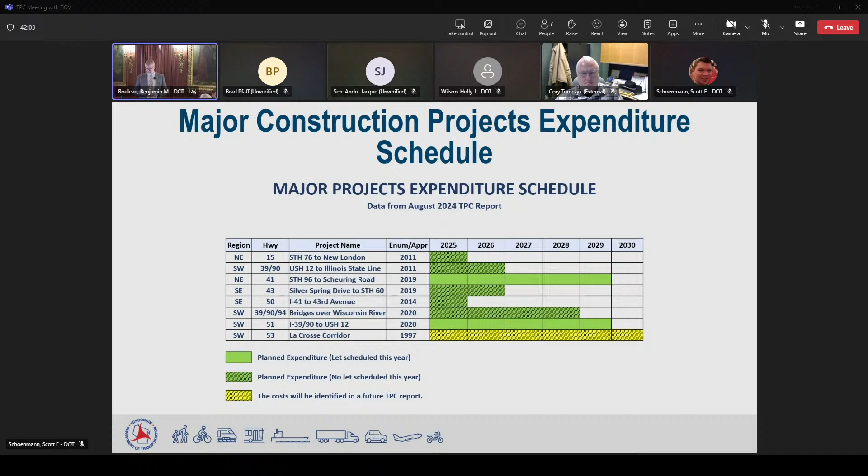I'll pause there to see if there are any questions before moving on. How does a project rise to the level of getting a study done in the first place? Where does that come from?

I'll get into that more later, but to answer your question, we go through a regular planning process in the department where we're always evaluating the needs on our system. Depending on the type of need, we go down two different paths. If it's rehabilitation, we handle those through our highway rehabilitation program, which is statewide. We have needs across the entire state, we identify those needs, and those are funded through SHRs.

For major highway projects, we'll see a definition of what that is a little later. When we see those needs pop up in our analysis, we do additional analysis to determine the best approach. Then we come to you, the TPC, and recommend further study of that project. If approved, we continue with that study. If not, we reassess how to address those needs, perhaps with temporary measures.

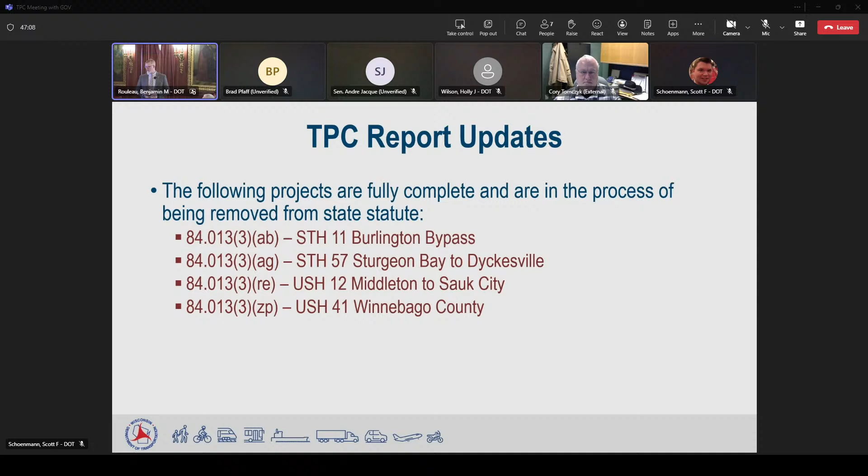Okay, a couple other things to note here. We've had some projects fully complete with their construction. As we reach the point where projects are completed with no more expenditures, we go through a process to remove those projects from state statute so they're no longer represented in the program, though we still note them in the report you receive regularly. So those are the 4 projects we expect to remove from statute this year.

I would also note State Highway 23 is currently open to traffic, so in our reporting we'll be moving that from active projects to the mainline open to traffic section.

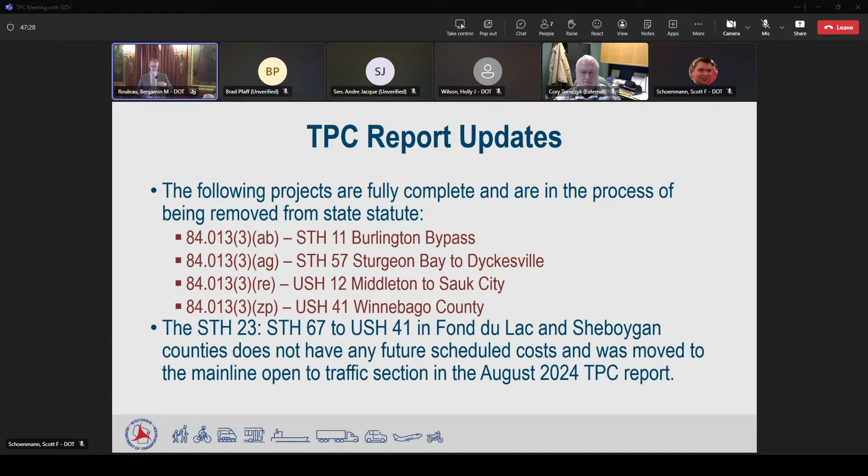I'll go over the roles and responsibilities over the next couple of slides, then give a quick overview of the project that Scott's going to talk about in a few minutes. There are really 4 core responsibilities for the TPC. I'll go through each one. It's to review and approve or deny potential major highway program projects for environmental studies. That's the process we were just talking about, where we've identified a need and need to go through the environmental process. We come to you seeking approval to begin that process.

Once we've gotten through that environmental study process, we come back to the TPC looking for a recommendation for enumeration. For a traditional major highway project, we make a recommendation to the TPC for enumeration. The TPC makes a recommendation, if you decide to, to the governor and the legislature for enumeration. Those projects are actually enumerated through the state budget process, so the commitment to funding happens through the state budget process. A recommendation by you to enumerate does not commit funding to the project, so it's an important distinction.

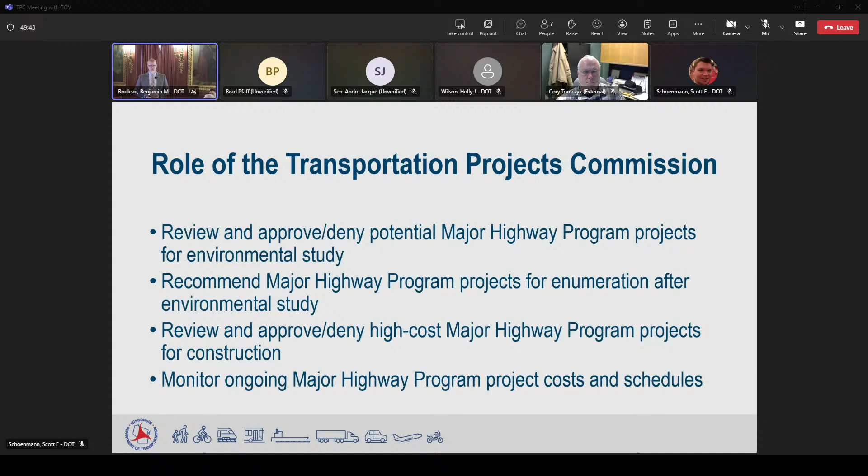Then there's review and approval or denial of a high cost major project. This one is a little different. Those projects are not specifically enumerated in state statute. So when we bring those projects to the TPC and you approve a high cost major, that is approval to commit funding to those projects, and we can begin construction immediately. And then the last responsibility that the TPC has is to monitor ongoing highway program project costs and schedule, which is what we just went through and how we report to you through the TPC report.

So I've talked a couple of times about major highway projects, the traditional project versus the high cost project. We thought we'd give you a definition of exactly what those are. The traditional major project typically focuses on some type of system expansion. It's a project that costs more than $30 million, and we're either relocating or building new highway, we're adding lanes, or we're converting an existing highway to freeway standards.

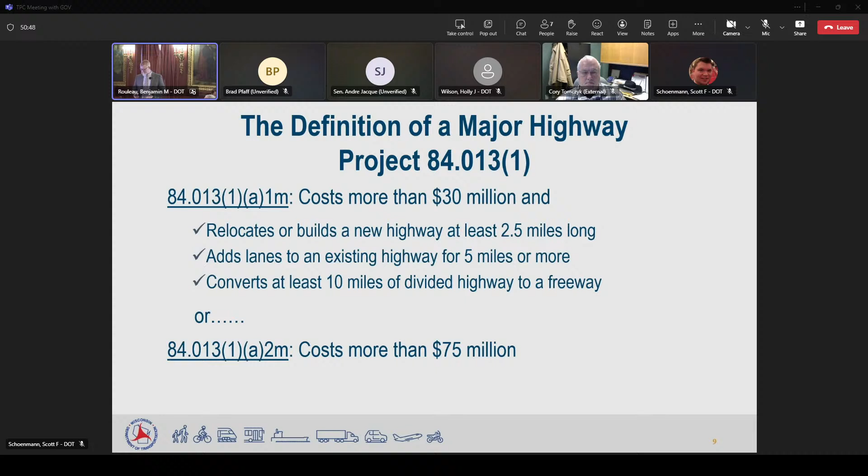The high cost major could be any type of rehabilitation project. So it's a project where, as we're going through our standard planning and study process through the State Highway Rehabilitation Program, we determine that the cost of that project exceeds a certain threshold. In statute, that number is $75 million, but both of these numbers, the 30 million and the 75 million, are statutorily indexed to inflation. So we use our Wisconsin Construction Cost Index to modify those numbers on an annual basis. That's published in October of each year through the newspaper and on our website, so that it's publicly available. The current numbers for those thresholds are 51.5 million and 128.8 million.

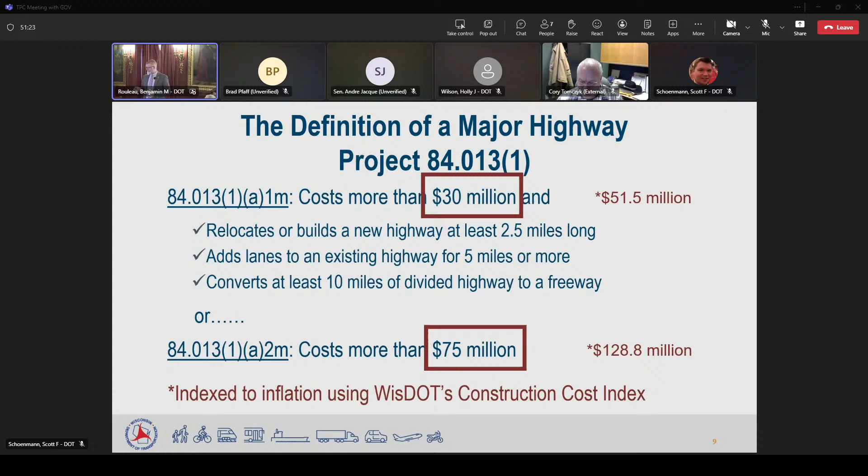So this is where I'll go through the process of how we get to where we are today. As I've said a couple of times, we go through an annual planning process. That's a long-term, long-range planning process. And as we identify needs on the system, those needs are identified through our asset management program. We're looking at pavement needs, structure needs, safety needs, and operational needs like capacity and other things.

Out of that process, when we've identified a need to address a facility that meets one of those definitions of a traditional major highway project, that's when we bring it to the TPC for approval to study. That happens in the odd years. We bring that to you, there's a recommendation, and if approved, there's several years of study before we then come back to you to recommend a project for enumeration.

If we're going to recommend enumeration, we have to make that recommendation to the TPC no later than September 15th of the even year. So you received a letter from the department indicating that we were going to be bringing some projects today, September 15th. And then the TPC needs to meet, if you're going to make a recommendation to enumerate, that recommendation needs to occur no later than December 15th of the even year.

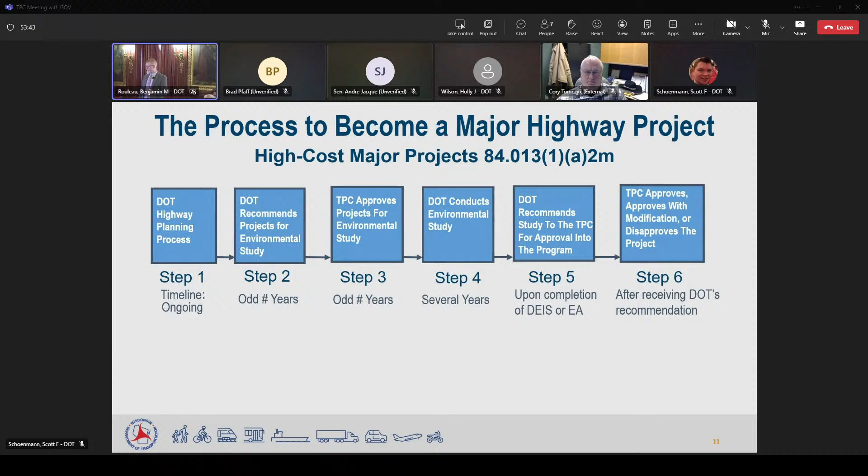The process to become a high-cost major project looks a little different, though you see the same steps here. What actually happens with high-cost major projects is that the study process happens within our state highway rehabilitation program, so we don't come to you looking for approval because it's expected to be a standard rehabilitation project. We only bring the project to you when we have that draft environmental document and we've determined that we've crossed the cost threshold.

At that point we bring the project to you. That can happen at any time. It doesn't have to be tied to an even or odd year like the traditional major projects, so those could be brought to the TPC at any point.

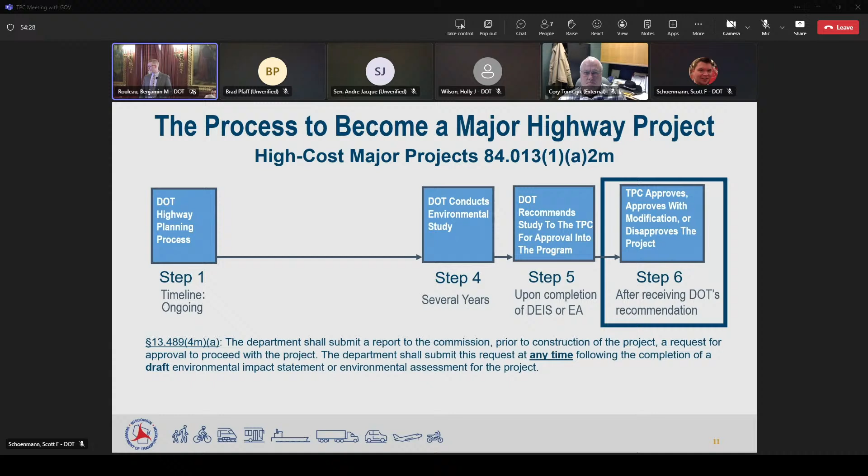I'll pause there for the high cost major. So it's coming out of the major program, the same appropriation as the traditional major highway projects. A little later I'll talk about our budget—everything has to live within that same budget. To pay for construction, yes, but for the study, that comes out of SHR, which is a different appropriation.

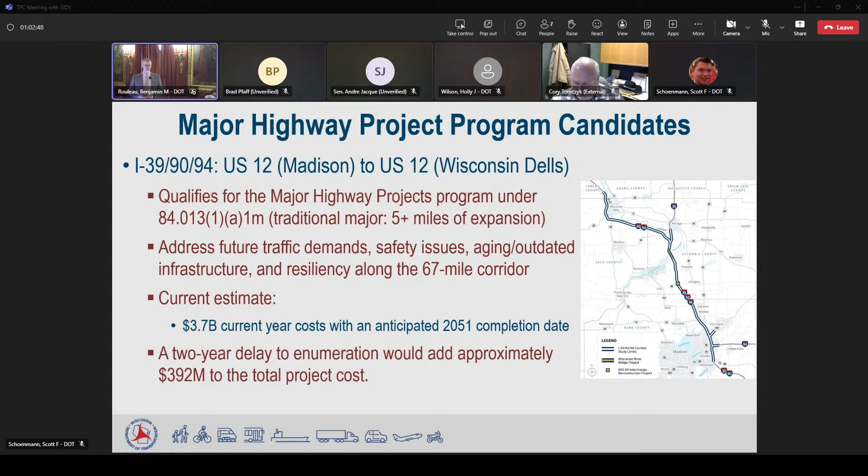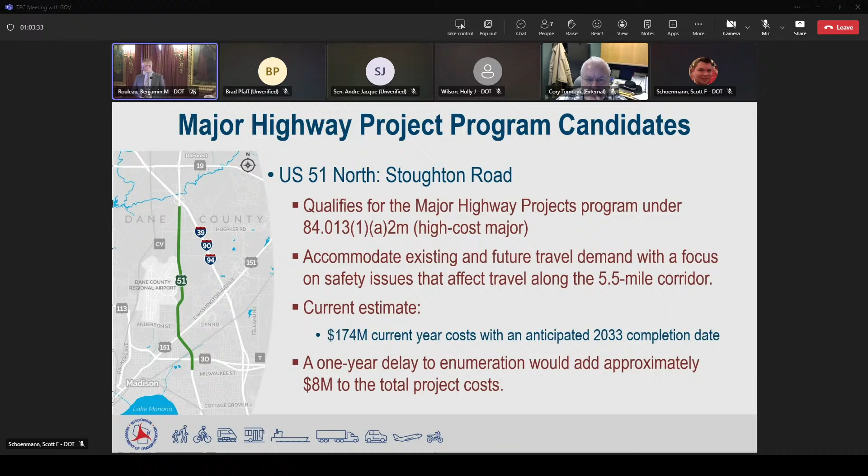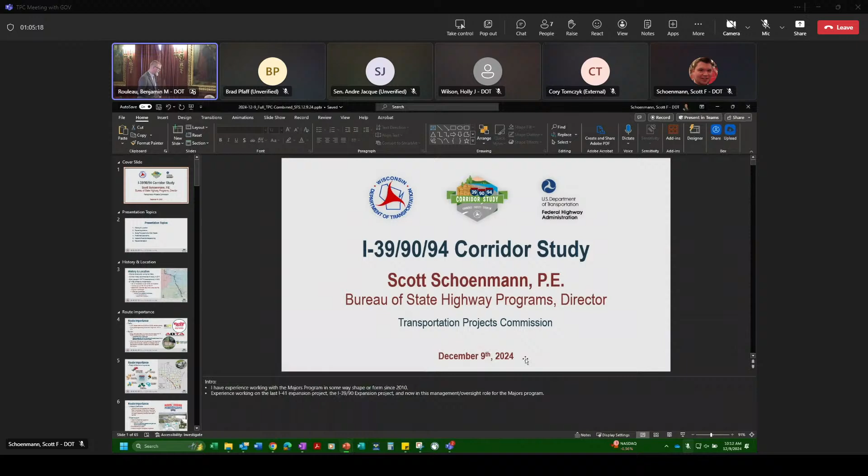That's all I have for my presentation. I'll see if there are any other questions before I hand it over to Scott. Okay, thank you. All right.

Good morning, everybody. My name is Scott Schoenmann, director for the Bureau of State Highway Programs, here to talk today about the I-39 project as well as 51. Before I get into that, a little background about myself: I've worked in the majors program since about 2010, starting off doing construction, inspection, and project engineer work on the I-41 expansion project in Green Bay. I came to DOT in about 2016 and worked on the I-39 expansion from the Illinois state line up to the Belt Line, then joined the Bureau in '21, and became director here just over a year ago.

So again, taking this majors program journey here today to talk about some potentially new major projects.

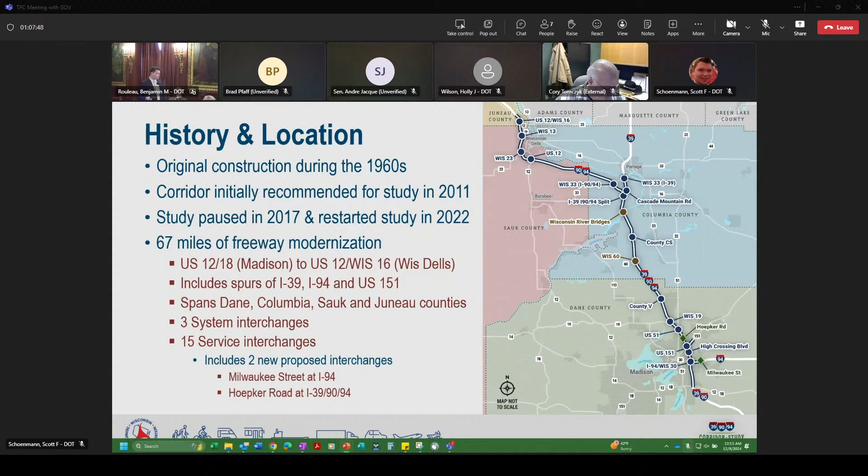This corridor is very important and has a lot of traffic. On average per day, we're at about 40,000 in the more rural sections, up to 110,000 in the more urbanized sections. To get a feel for that, 40,000 would be about the range from Madison to the Wausau area on 94.

And that 110,000, that would be going on 94 from Waukesha towards downtown Milwaukee, or 94 south of Milwaukee going down towards the Illinois state line, Chicago area, which was also recently expanded from 6 lanes to 8 lanes.

Along this corridor, it's one of the heaviest truck routes in the state. We've got 19 to 31%, or approximately 25% trucks.

It also has a large economic impact, approximately $5 billion in 2023, as far as economics moving through the corridor related to tourism. If we look at the counties just to the north as well, that adds another $2.5 billion, or 10%. So a lot of movement through this corridor.

As mentioned before, it also acts as kind of a gateway through the state, connecting Madison, Milwaukee, Chicago, Twin Cities, and all over the Midwest.

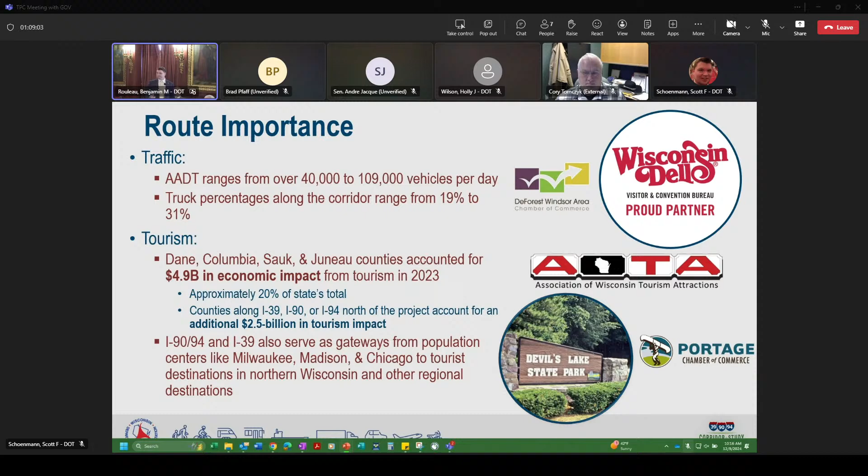When we're talking about freight movements in this corridor, this past year there was approximately $120 billion worth of freight that traveled through this corridor: 9.1 billion in wood and paper products, 12.5 in machinery, approximately 7.5 in farm equipment, 18.5 in food products, with over 20,000 trucks per day using this corridor.

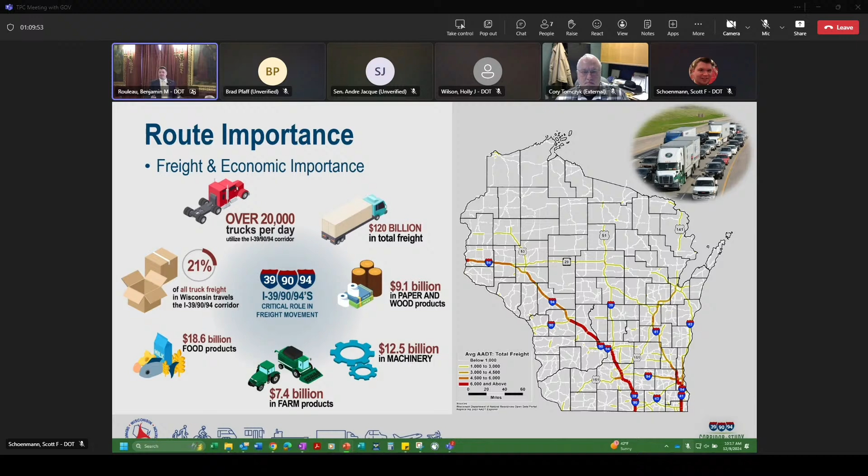But you can see here that even if it's not directly along this corridor, the heat map shows how everything kind of spreads out and sprawls from this corridor. So no matter where you're at in the state, you're likely impacted by goods and services moving through here.

This route is also important for mobility and operational convenience to access healthcare facilities. With that potentially new Hoepker Road interchange, that also provides some emergency vehicle access to the interstate if there were to be an accident within that area.

This project has had a lot of support. There's been a coalition group that's formed, the Central Wisconsin Interstate Alliance, made up of tourism groups, local municipalities, businesses, and industry in support of the project. At all of our involvement meetings, we've had overwhelming support and feedback.

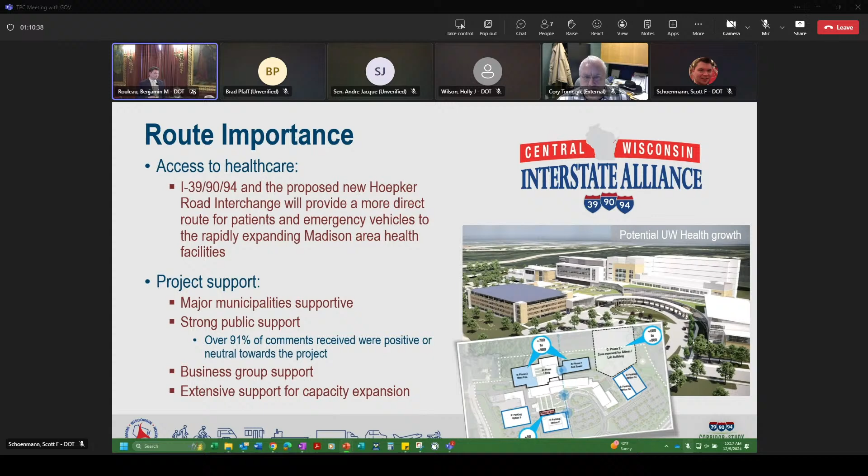So looking at the study, the purpose and need, we're going to be addressing the safety issues that exist out there, looking at the aging and outdated infrastructure, updating the traffic and operational conditions, and improving the resiliency of the corridor. We have flooding up near that portage split. It's known, and with this project we're going to be able to address that.

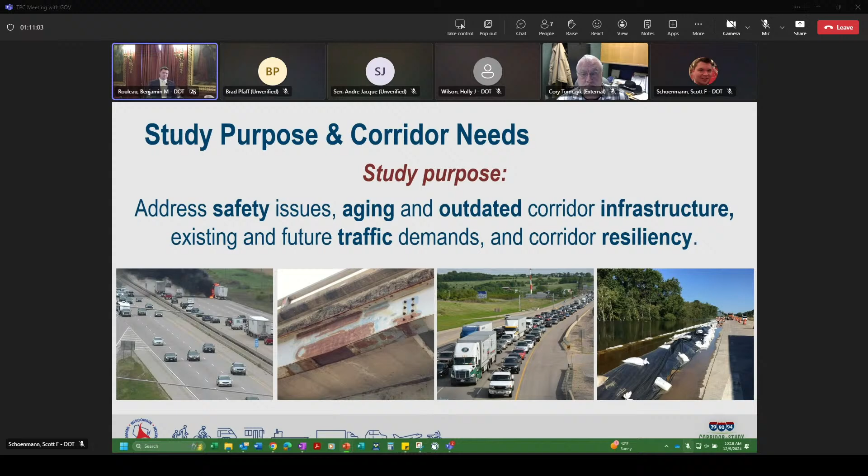So looking first at the safety throughout the corridor, it was built in the 60s and currently has substandard geometrics. What does that mean? That could be anything from left-hand on-off ramps, turn lanes that aren't long enough, ramps that aren't long enough, or things spaced too closely, like on-ramps spaced too closely. They exist up and down the corridor, and we'll be addressing them with this project.

Currently, over 70% of the corridor exceeds the statewide average as far as crashes go. We have on average 2.5 crashes per day, 4 to 5 injury crashes per week, and unfortunately a fatality approximately every other month. Without this project, we know those numbers are going to increase. Traffic is going to keep going up, and those rates don't go down.

But with this project, we know we can decrease those mainline crash rates by approximately 11 to 13%, which translates into about 30 to 35 injury crashes over the course of a year. Those are real crashes, people actually getting hurt. And that 11 to 13%, we're hoping that's on the low end.

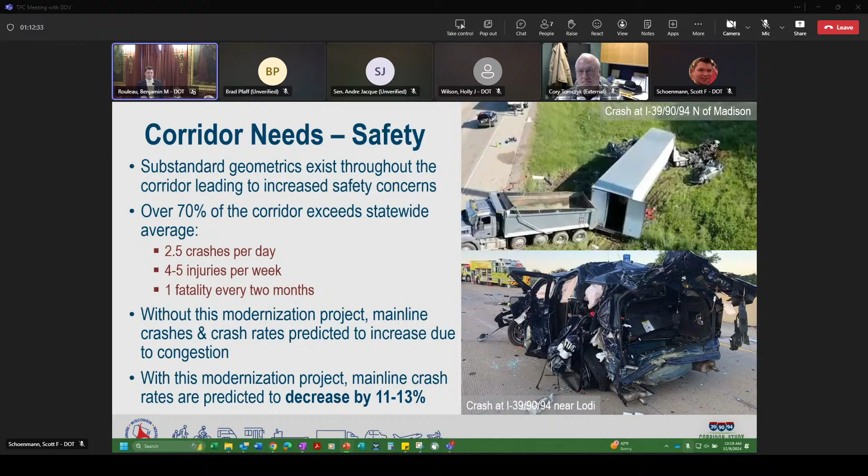When we look at recently completed major projects, like I-39 just to the south, crash rates have reduced by approximately 25%. Looking at I-94 from Chicago up to Milwaukee, we've seen about a 14 to 20% reduction in mainline crash rates. So again, hoping those are on the low end, but being conservative with our numbers.

When we're talking about safety, we're talking about mainline crash rates. We also have specific interchanges that we're going to be able to modernize and improve, driving those crash rates and fatalities down even lower, because that's where a lot of those crashes do occur.

For some examples, we've got US 12, which is up near the Wisconsin Dells exit. With the improvements we're looking to make there, we anticipate fatalities would be reduced by approximately 20%. Cascade Mountain Road interchange is underutilized and has a lot of safety issues. With our build alternative, we're going to be removing that interchange and eliminating all of those crashes. That will now be serviced by Highway 78 that goes through that area.

We also have Wisconsin 19, which is in the DeForest Windsor area. That intersection, as anyone who's driven through it knows, you get off, there's a handful of lights, there's railroads. It's a very busy intersection with a lot of crashes. With these improvements, we'll be able to reduce those by approximately 50%.

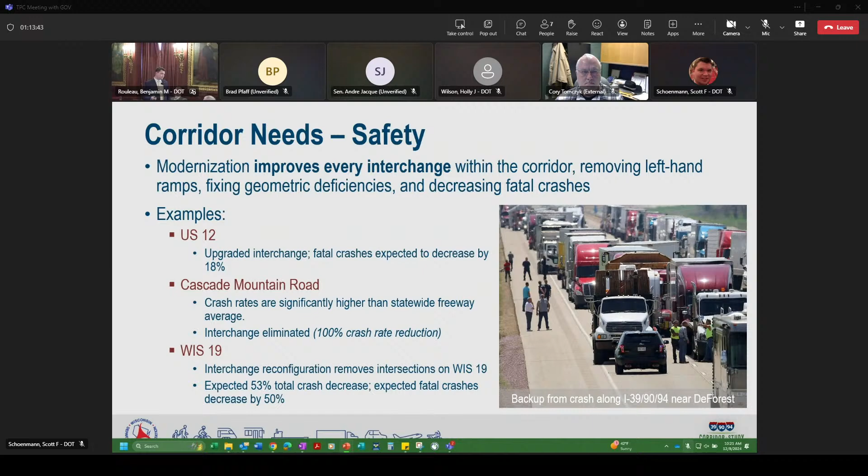To illustrate one of the more common known issues with the left-hand on-offs: this represents any PM peak period, a Thursday night, heading southbound on I-39/90/94 at the 151 area, heading towards 94. We've got approximately 2,000 vehicles coming down the interstate, another 2,000 getting on at 151, and another 700 getting on at High Crossing. We know some of that traffic needs to go all the way from those on-ramps over to 94, making approximately four to five lane changes within a 1.4 mile section.

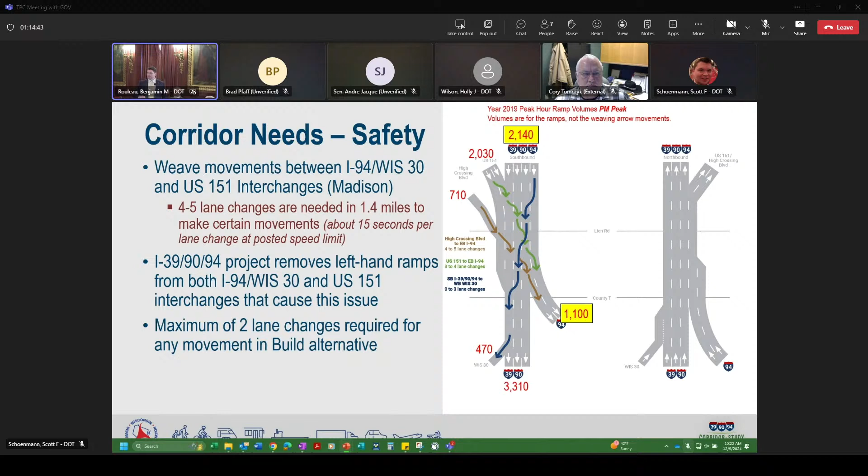And the more lane changes we make, the more dangerous things become out there. So there's a lot of weaving in this section because of those left-hand turns. On the weekends, these numbers are almost doubled. We've got almost 4,000 cars coming down the mainline, 2,000 going off to 94. The 151 traffic is a little reduced on weekends, not as much commuter traffic, but there's high volumes and a lot of movements.

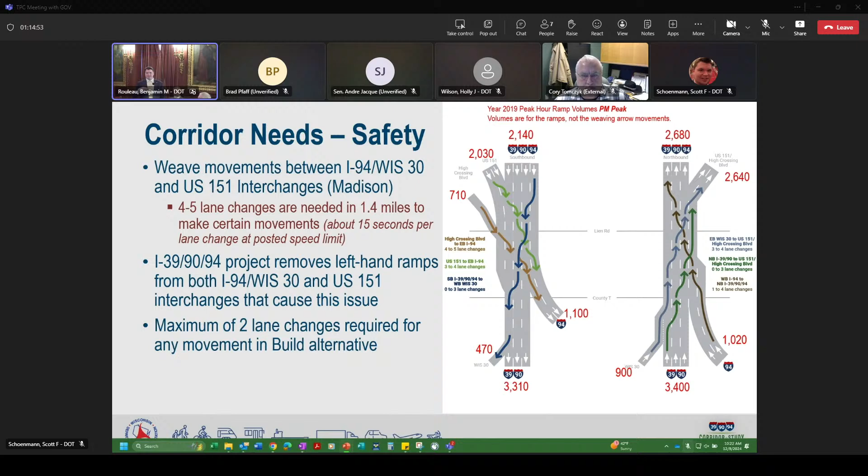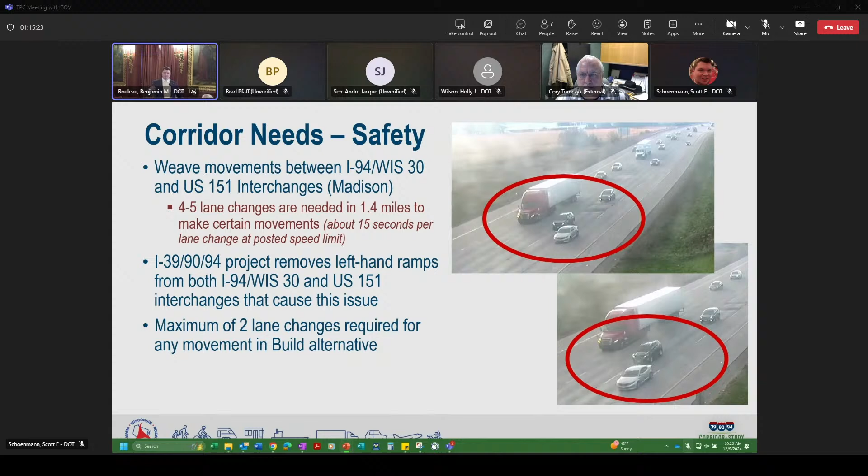Same thing on the northbound side, as most people are aware. If you're going from the Madison area up towards Sun Prairie, a lot of weaving movements occur through those segments. The more lane changes needed, the more potential there is for incidents to occur. With the build alternative, we're going to separate a lot of those movements into collector distributor lanes, with median or barrier separated lanes to the outside where all the on-off ramp movements occur, and then the mainline is free to keep moving.

Still hitting on safety, but going to structures now. We've got approximately 113 structures throughout the corridor. 60% of them are near the end of their useful life as of today. And then we've got a lot of bridges out there, built in the 60s, that are structurally deficient or functionally obsolete. Fancy words for just saying that they're out of date. They don't meet modern standards anymore.

We know we have issues, as mentioned, at Mirror Lake, where we've had incidents with truck traffic going off that bridge. And those structures are also considered fracture critical. So what that means is, if a structural member of that bridge were to be taken out by a semi or something, there's a high likelihood that the entire bridge would collapse.

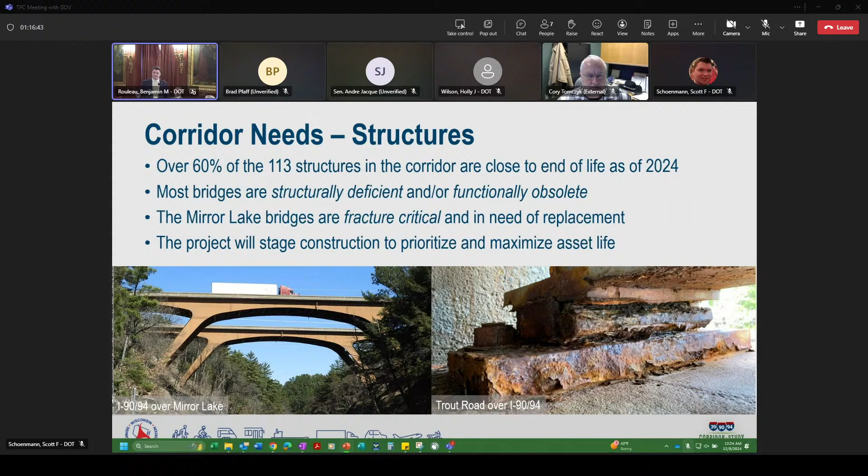Thinking about a more modern structure that's not fracture critical, you could think about the Leo Frigo Bridge up in Green Bay, 2013. I think that had a pier failure. But fortunately, there's enough steel in the deck that that bridge held, and a vehicle actually went across it before State Patrol got out there and was able to shut it down. That would be an example of a structure that could sustain some damage and still be standing.

And again, as mentioned, at Mirror Lake, we've had issues with semis going off, and unfortunately, in 2019, there was a fatality at that bridge. So with this project, we'll be able to stage our construction to line up with the asset life of those structures and be able to prioritize and maximize it.

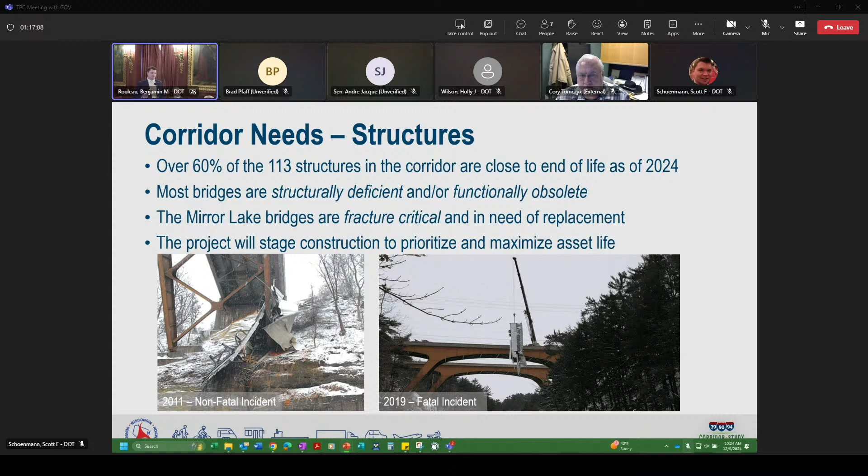Looking at our traffic, again, all tied back to safety, we've got 40 to 110,000 vehicles within the Madison area with steady growth projected. We have about 25% trucks, and when we're looking at operations, the heavier truck percentage has a heavier hit on those operational impacts versus just standard vehicles.

This corridor also experiences some unique traffic patterns. At any time we have our travelers going from point A to point B through the corridor. We also have our weekday peaks for commuter traffic going north and south. And on the weekends, we have our tourism traffic, usually starting Thursday evening and running through Friday and Saturday. But no matter when people leave for the weekend, everybody comes back Sunday afternoon, and that's where we get a lot of these traffic conditions.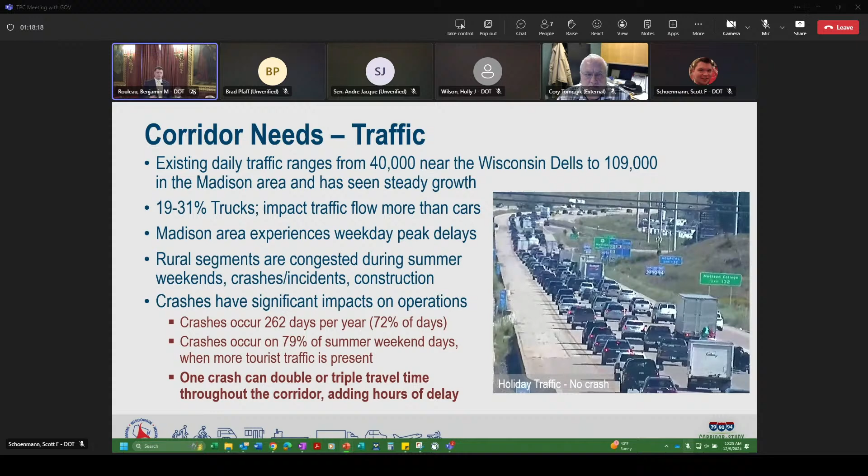And one accident on a Sunday afternoon, as I'm sure a lot of people have probably experienced, can back things up for hours or cause a detour that takes quite a lot of additional unplanned time.

We're going to look at the entire corridor and its level of service, but first let me explain level of service - we assign letter grades to certain segments. We've got our A's, B's, and C's, which are always desirable, with almost no or minimal traffic. We also have our D conditions, which are acceptable in urbanized areas, although in rural sections we're shooting for the A's, B's, and C's. Then we have our E's and F's, where we're noticing significant delays, and in the F scenario, that's when we get into major backups, stop and go traffic along the interstate.

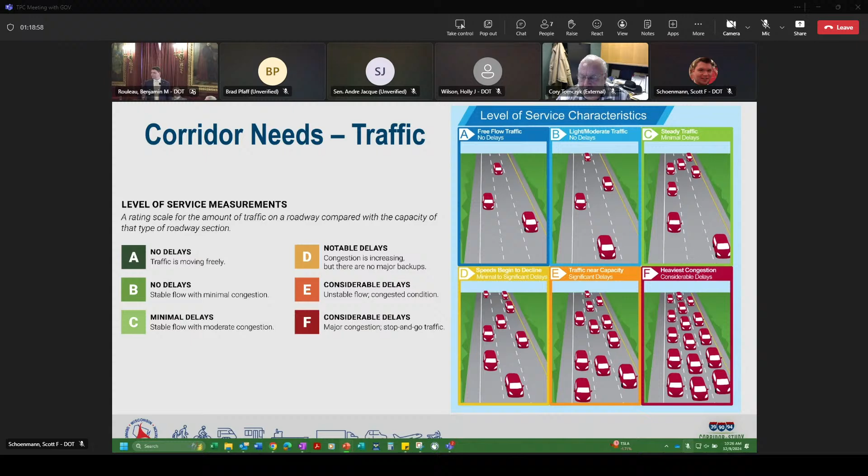So looking at the corridor today, that's the left-hand side graphic and the left side of the bar chart. We have a lot of C's, D's, and some E conditions. Currently, approximately 3/4 of the corridor operates at undesirable operational conditions. When we look out to 2050, we see a lot of those C's, D's, and E's flipping over to D's, E's, and F's, especially in the Madison area and up in the Dells area.

With this project, we're going to be able to make all those operational improvements throughout the corridor, add in the additional lane for capacity expansion, and we will be at 100% desirable conditions throughout the corridor with the build scenario. There are a couple of D level of service areas in the urbanized areas, but again, those are acceptable for that area.

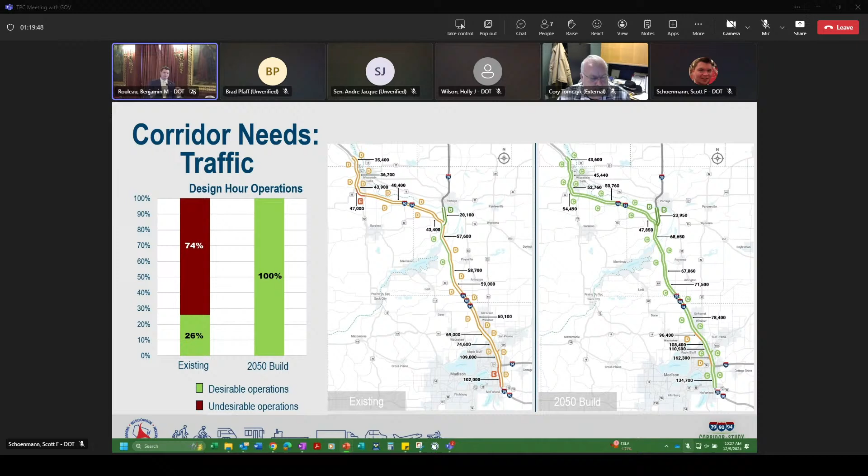And lastly, looking at the infrastructure needs of the pavement, again, most of this was built in the 60s, so a lot of it is coming up on its next major pavement replacement. The map on the right, a little hard to read in the corner there, but the deep red on this map is representing when the next major pavement replacement or pavement project is due along the corridor.

The deep red is areas that need to get addressed by approximately 2032. The orange goes out to 2040, 2045. The yellow goes out to 2045, and then the green is beyond that. So the majority of the corridor has pavement issues that need to be addressed, whether this project occurs or not.

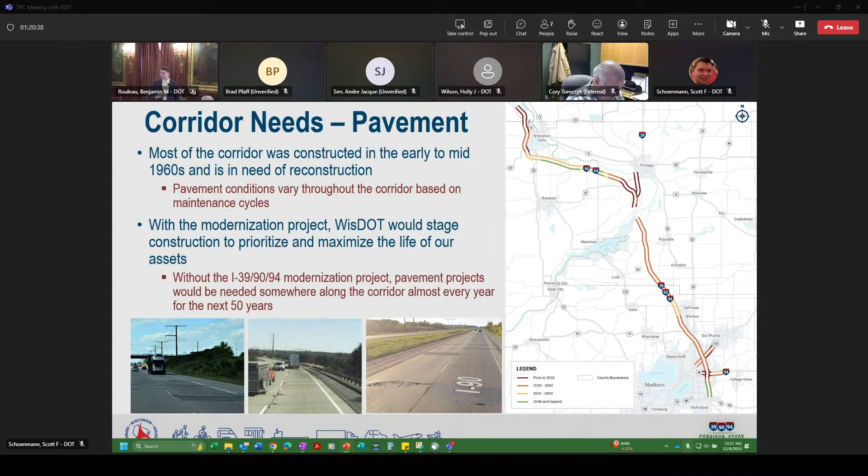And then lastly, for our corridor needs, we have the flooding area that I mentioned. There's been several flooding events, one in 2001, two in 2004, 2008, and 2018. We've had diversion, we've had National Guard out there sandbagging and maintaining the interstate. Not only does it get shut down, but also when you have that amount of water, it gets into the subgrade.

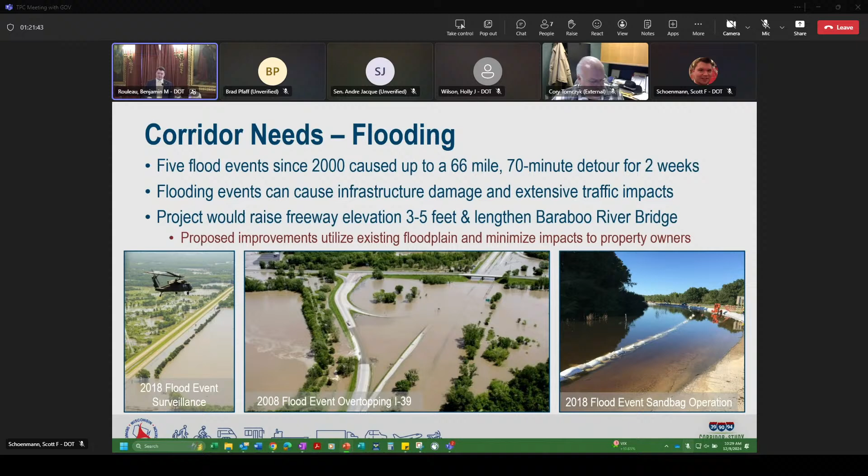So with that, looking at our preferred alternative, we're going to be modernizing and improving every interchange along the corridor. We're also going to be looking at capacity expansion. Starting on the south side, taking off from the Beltline interchange, we've got one added general purpose lane, so up to 8 lanes plus auxiliary lanes, which act somewhat like a 5th lane, between the Beltline interchange up to the 39/94 system interchange.

Between the 39/94 and the 151, that'll be 8 lanes plus those 2 collector-distributor lanes on either side for all of those movements. After 151, we go back to 8 plus 2 auxiliary lanes. From there up to 19, it'll just be the 8 general purpose lanes. After our split at Portage, we'll be adding 1 lane, so going from 4 to 6 up towards the Dells. The split up towards Portage will remain at 4 lanes.

So again, with this project, we'll be able to stage it so that we can maximize the life of all the infrastructure. We're also looking at a couple of new interchanges, looking at noise barriers where feasible and reasonable, and then also looking at bike and pedestrian accommodations at the intersections and interchanges where we can make those local connections.

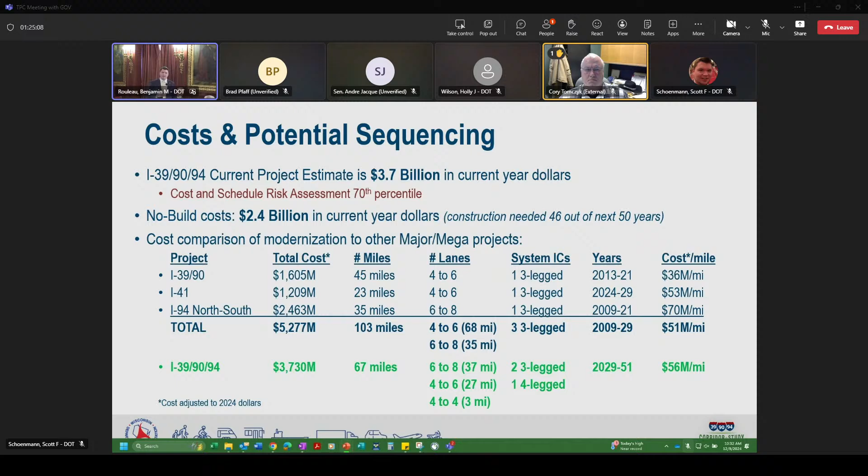When we're looking at the sequencing, again, we're trying to line up portions of the project with the assets we have out there. So we'll be starting in the Wisconsin Dells area, where there's a lot of pavement issues as well as structural issues. We'll hit that first, then jump down to the 151 intersection to reconstruct that and get the safety and operational benefits, then back up north for the stretch between Portage and the Dells, and then the Portage Triangle.

And then back down at number 5 there to the Beltline to 30, and then finally the expansion of the piece in between, I guess.

They moved that. Go ahead. He's moving up. Anyways, I'll ask. Sure, go ahead.

Being a Dells area legislator, knowing what it's like in the summer of 29, summer 30, what kind of impact are you expecting on Highway 12, 16, and 33 if people are trying to avoid that area? Is that something that's been under consideration, as people try to get on and off the construction and hit those back state highways?

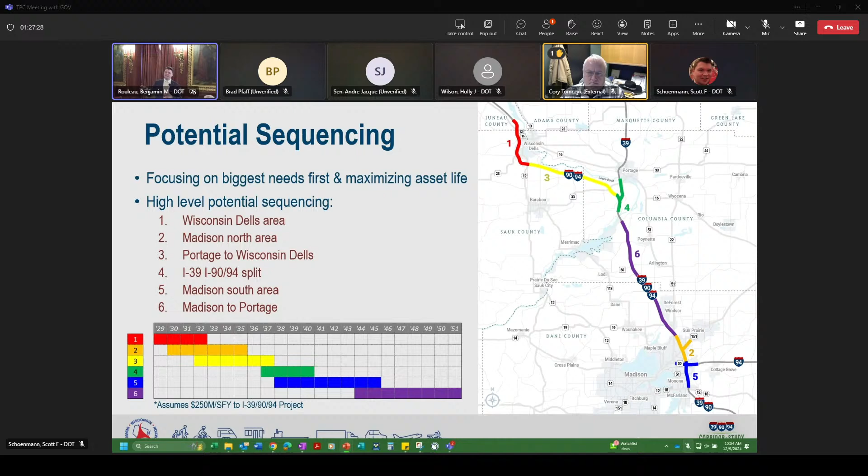Another thing to note, and Justin had mentioned it, we have a completion date out to 2051, but this is taking a flat budget approach while inflating the cost of the project out. So what we're looking at here is kind of a worst case scenario as far as finishing in 2051. If we're able to get additional funding, or maintain a budget that keeps up with inflation, we're going to be able to knock at least 5 to 10 years off that target completion time if we get additional funding for this project.

That could be from potentially additional majors program funding or grants. We've had a pretty good history here of receiving federal grants—the Blatnik Bridge with Minnesota for just over $1 billion, the Wisconsin River Bridge for $80 million, a project down on I-41 that got a $15 million grant, and a handful of rest areas that have received grants as well. So we've been looking at this project, finding the areas we think would make good grant candidates and identifying those, plus which programs they would qualify under. So if enumerated, we'll be ready to pursue additional funding opportunities.

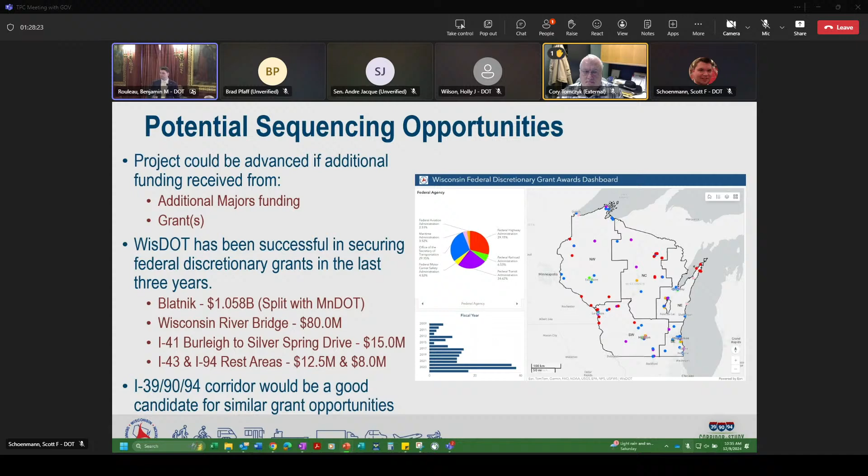Again, this project has had significant support. We've had a coalition formed in support of the group, coordination with municipalities—the Village of DeForest just sent in a letter of recommendation for the project this past week. We've been coordinating with local officials, federal and state agencies, and we've just had overwhelming support for the project.

So with that, this route is one of, if not the most important routes within the state—94 north-south being one of the other major freight routes that was just recently expanded. This project facilitates all of those safety and operational benefits so that into the future we have a good flowing system that can get people and goods through Wisconsin. So with that, we're requesting the TPC vote to recommend enumeration of this study as a traditional major project. I'll take any questions at this time.

Say that again? What does it mean to enumerate something? I guess, put it into the budget so that we can continue with final design and construction.

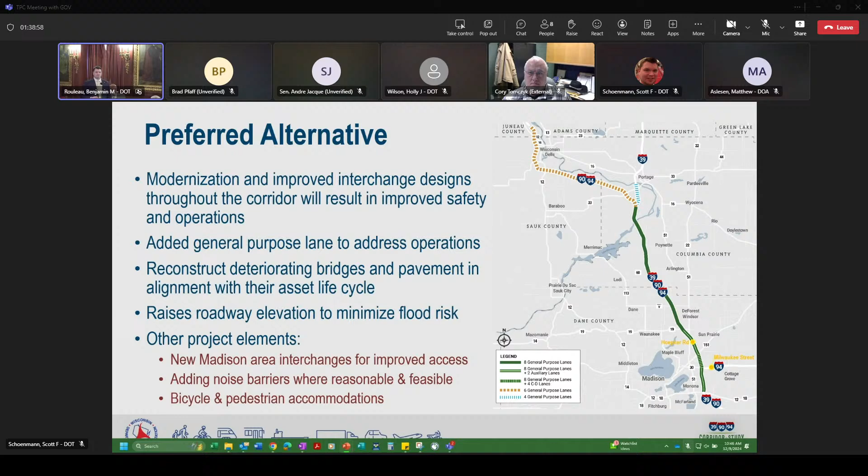Senator Tomczyk? Well, you and I are amazingly on the same page, Governor. I want to vote on this project. You never know, you never know. There might be more.

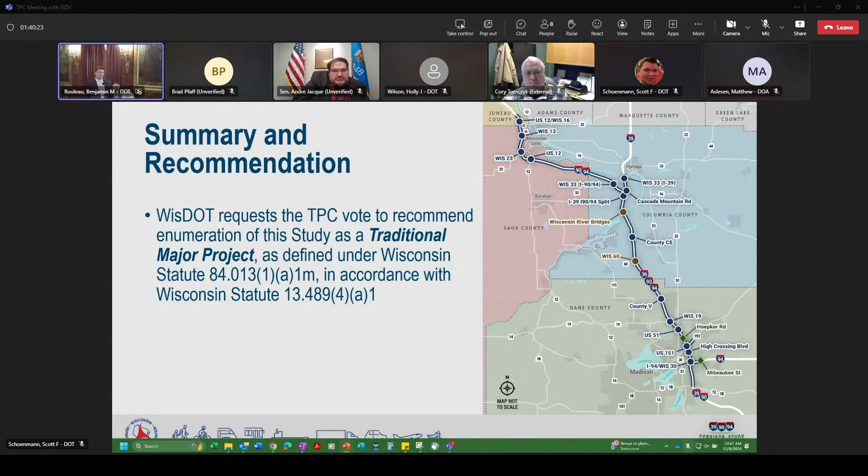Good work, thank you for that. I just want to do a time check because this meeting is until 11, and we do want to go through the 51 project. I know people have had the binder and hopefully had a chance to review it, but Scott, can we move through that one? If there's time, I'll touch on a couple project updates; if there's not, we'll just move past it. Those project updates are in the binder.

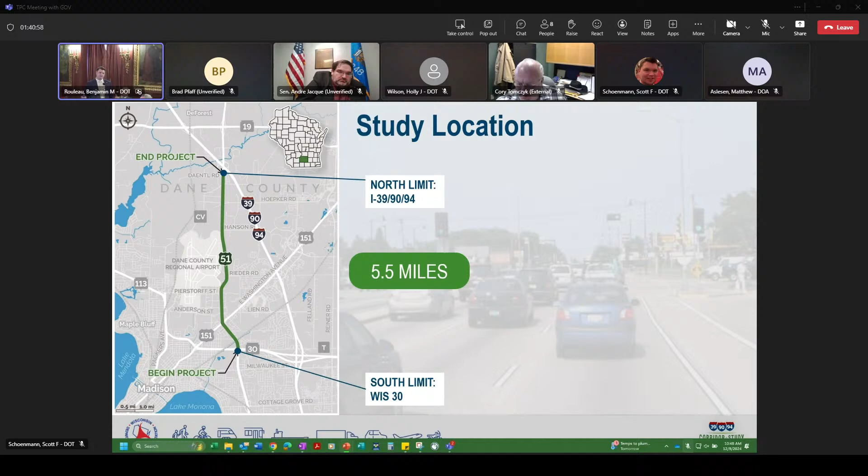So looking next at 51 Stoughton Road North. Again, going to go over the location, history, purpose and need, preferred alternatives, sequencing and cost, and then our recommendations. This is a north-south route on the east side of Madison, going from State Highway 30, or Wisconsin 30, 5.5 miles up to just south of the interstate. Traffic volumes in this area range from approximately 13,000 on the northern rural end down to almost 50,000 near Wisconsin 30, which is a very busy urban freeway.

Looking at this corridor, it's broken up into three fairly distinct segments. I'll start down in the southern section, which is one of the busiest: it has 6 lanes, 3 in either direction, 45 miles per hour. That goes from 30 all the way up to the East Washington Avenue intersection. From there, the speed limit transitions to 35, and we lose a lane in the northbound direction past the East Washington intersection. As we continue north, just north of Anderson Street at Kinsman, we lose that lane in the southbound direction. So it's two lanes in each direction on the northern side as it goes into the more rural area and transitions back up to 55.

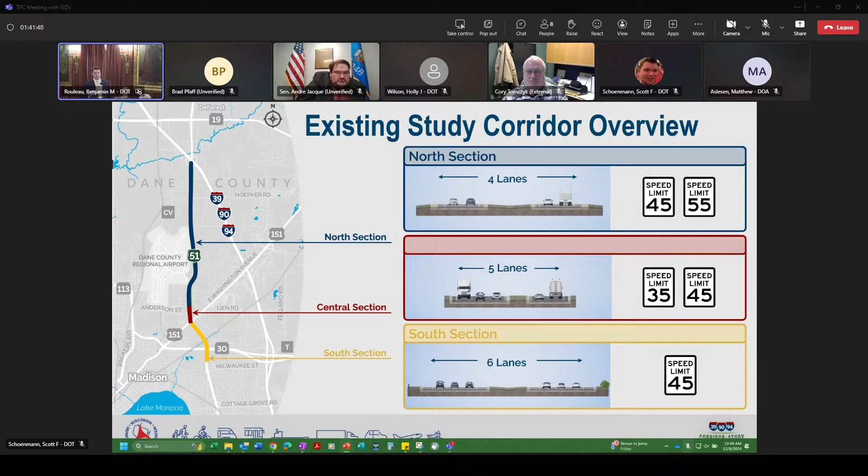Also noteworthy, the central segment is our highest pedestrian and bicycle area because there are local businesses, neighborhoods, as well as the MATC over in that area.

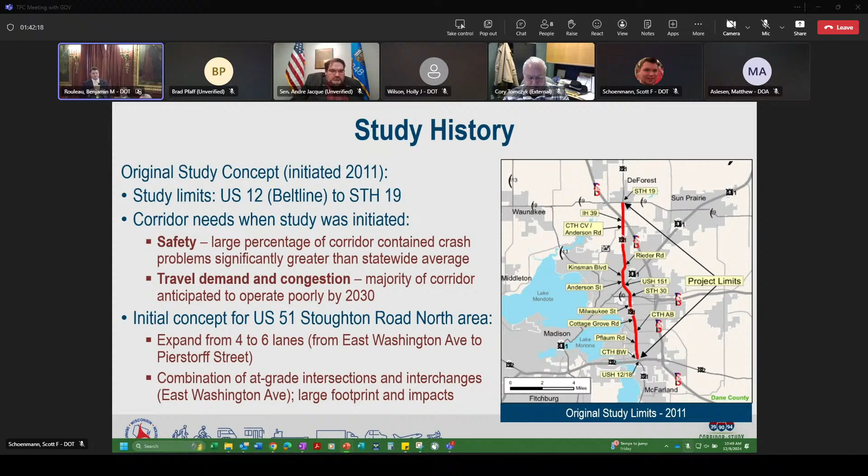Looking at the history of this project, similar track as I-39, it was kicked off in 2011, then paused in 2017 due to funding and other priorities, and started back up in 2022. With that initial study, they were again looking at safety and operations, although the alternatives they were looking at were expansion, going from 4 to 6 lanes, having combinations of grade separated and at-grade intersections—so much larger footprints, much more impacts.

So today, taking that new approach, we're splitting this corridor at Wisconsin 30, since the northern and southern sections operate much differently from each other. On the northern side, we've been investigating lower impact alternatives that are more in line with community planning and the interests of the key stakeholders in the area.

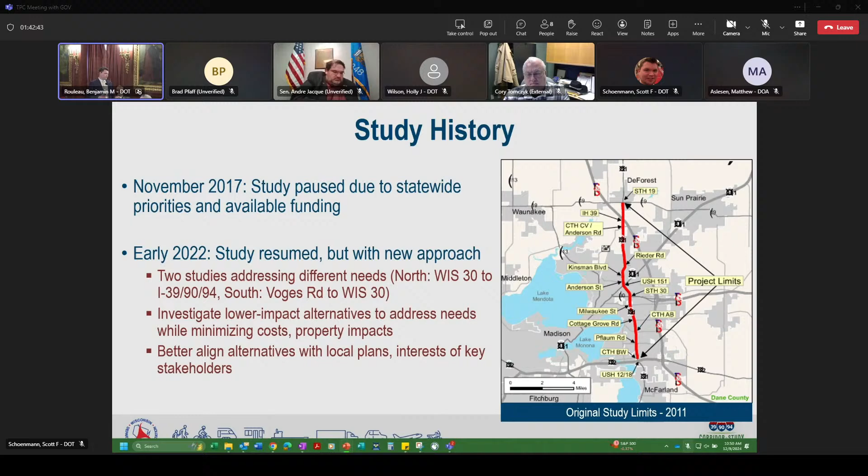Looking at the purpose and need of this study, there's been a significant amount of crashes, 2 fatalities, as well as 12 serious injuries during the study time frame. There have also been, unfortunately, 2 additional fatalities this past year, one being this past Friday at the Wisconsin 30 intersection. So we've got a lot of crashes that are mostly focused around the intersections along this corridor.

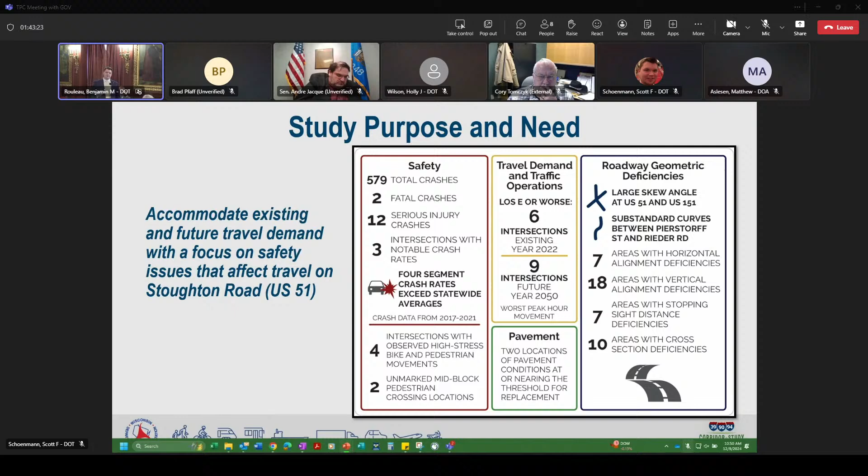That's where we're going to be focusing most of the efforts. Also, there are some geometric deficiencies. There's a large skew angle at the East Washington interchange, it hooks right if you're going north. And then there's also some substandard S curves that exist in the northern segment as well.

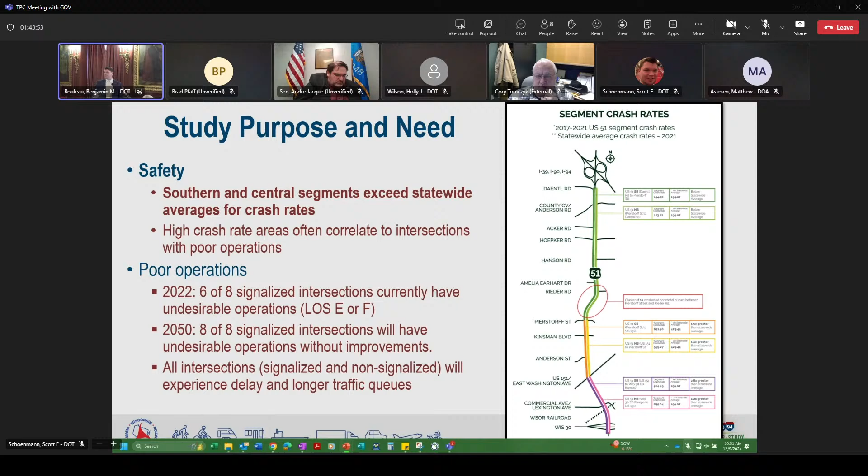Looking at safety, going south to north, the purple and pink represent statewide crash averages. The purple and pink are somewhere between 3 and 4 times higher than the statewide average. The middle section, yellow and orange, is about 1.5 times the statewide average. And on the northern section, it's green, below the statewide average, but we do know that we have issues at that S curve, as well as some problematic intersections up in the north.

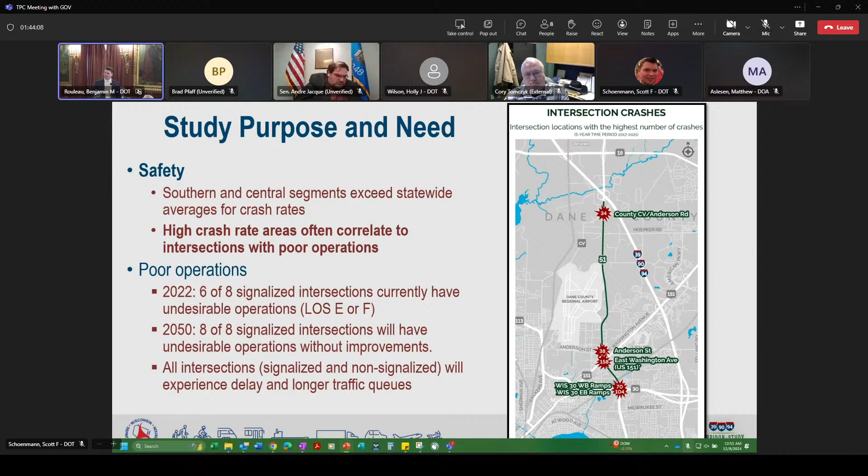Looking at some of these intersections, we know we have issues down at 30, East Washington, Anderson, and then CV up in the north. As we look into the future and get additional traffic on this, we have more of those intersections that will eventually start to break down even further.

When you're in an E and F scenario, there's a lot more traffic. You're stuck there for 2 or more light cycles, and that's generally when driver behavior takes over. People make worse decisions, they run yellows, and that's where we can get into some unsafe conditions.

Again, we have some of those geometric issues, the skew angle at East Washington, which if anyone's ever driven that one, it doesn't meet driver expectations with that large hook in there. If you stop paying attention for a second, you accidentally drift into another lane as you're trying to get through there. Also, we mentioned the S curves up on the northern side where there was a fatality this past year.

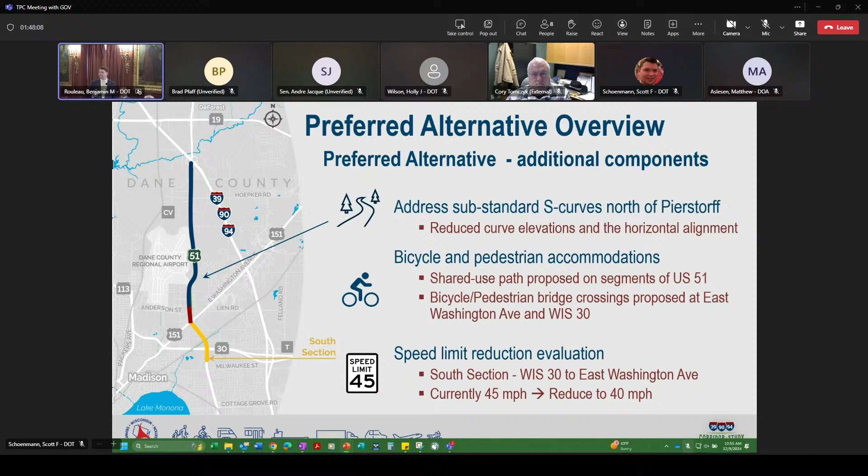So how are we going to build this one? We're going to start in the north section where we can coordinate with the I-39/90 project. We want to make sure that if the potential Hoepker interchange goes in, this one is prepared for it, as well as coordinating on the northern side with the 39/90/94 intersection. Then we'll be able to address the pavement needs in the S-curve in the northern section.

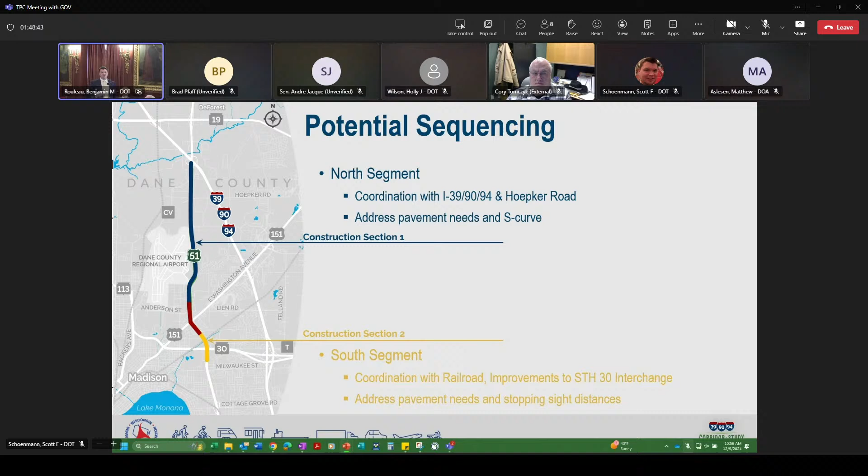Next, we'll jump down to the south to get the Highway 30 improvements, as well as address the pavement needs that exist down there. There are some vertical sight distance issues with the hills in that southern segment that we'll be able to take care of.

And then lastly, we'll go to the middle section, the East Washington Avenue interchange, address that intersection, put in that pedestrian accessibility, and continue our ongoing coordination with the City of Madison.

So this project is currently at $174 million with fairly minimal relocations and right-of-way needs, as opposed to the original concept, which was looking at full expansion. You can see there are many more relocations and many more right-of-way takings that would have needed to occur.

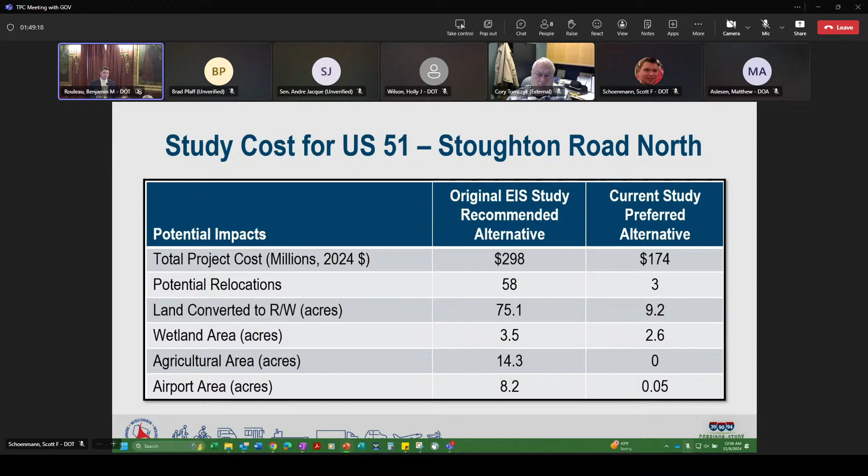So with that, we're recommending and requesting that the TPC vote to approve this study for construction as a high-cost major. If approved, we'll begin final design in fall 2025, construction likely to begin in 2029, and anticipated completion in 2033.

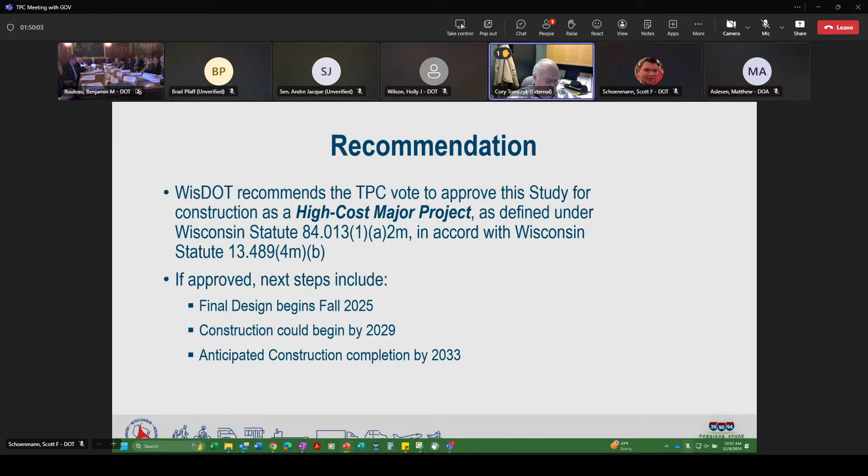Any questions? I have a question about the northern section, which I believe would be the first section you propose to work on. You had a slide up that showed it was green, having not as much concern as the southern end. Are we doing that section just because we're already there, or what?

Again, it goes back to how are we prioritizing these projects. What's making that section, and this whole stretch, elevate to being the whole thing?

I think that section, in order to align with I-39, needs to go first. Also, as you can see on this slide, some of the intersections that exist there today and work fine are not going to exist there tomorrow, and are not going to work as well if we don't address it. So hitting this area first will align with I-39, and we'll be able to make sure those intersections remain in good condition.

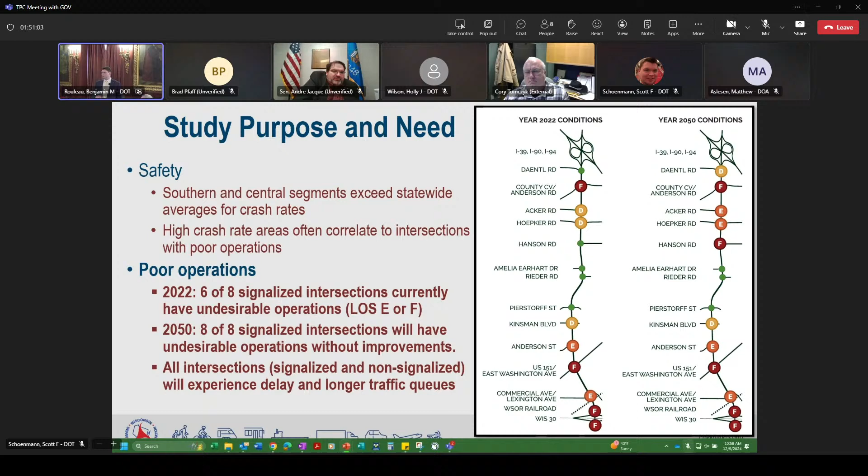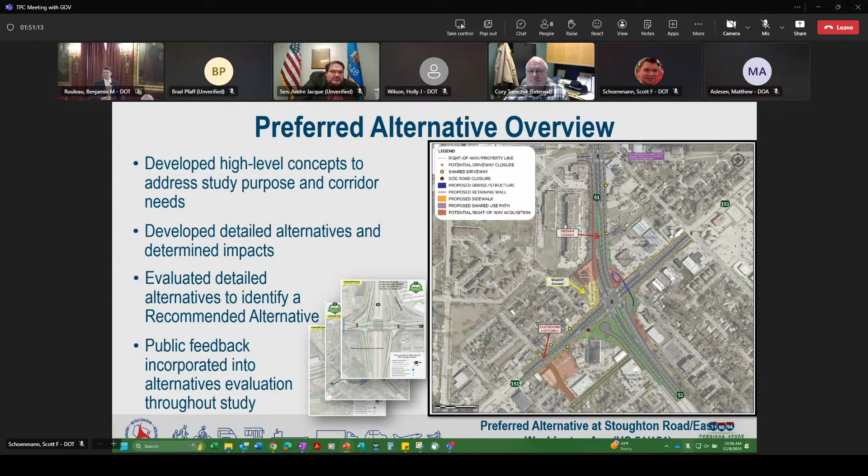Okay. Other questions? All right, that'd be great. We have a motion. Do we have a second? We have a motion and a second.

Any other comments, questions? Hearing none. All those in favor say aye. Yes. Okay, Senator.

Thank you, I'm very talkative today. I have grave concerns, maybe not grave, but concerns over the prioritizing of some of these projects. We heard someone else talk about the 94 in Waukesha, and I agree there are sections there. I would very much look forward to learning more about how these projects and sections are prioritized, and how many studies we can have going at one time, and how we pick where we're going. I understand there are capacities of the system, but I need to be better educated on that. I will be voting no on this project simply for that fact.

I don't know much about south of East Washington, but I drive 51 from 39 to East Wash every time I come to Madison. Are there concerns? Sure. Are there worse parts of the state? Yes.

All those in favor signify by saying aye. Aye. Opposed? Motion carries.